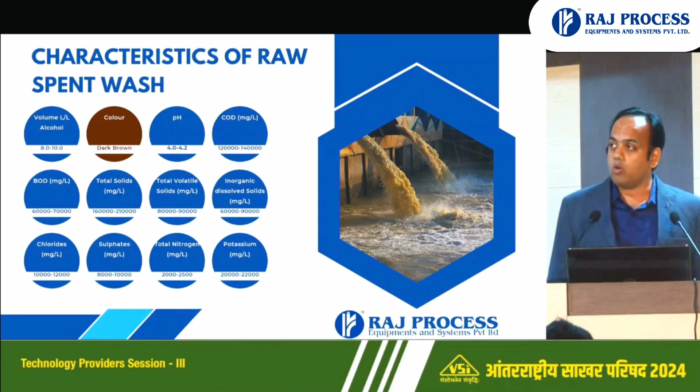So what can this organic load help us achieve with this spent wash? Now this is the typical flow diagram of how we are going to treat the spent wash. From the distiller you get the spent wash, ENA, RS, that is your final product, but what you get is the raw spent wash. We treat it in the biodigester, and after keeping it for 25 days, its COD value comes down by 65%, and you get the biogas.

That's a precious gas. 3 years back, government used to give around 46 rupees in hand. Now you get about 70 rupees when you convert this biogas into CNG. So rather than burning the biogas in the boiler, or incinerating the spent wash, we prefer you go with this bio-CNG concept.

Now, if you go with the bio-CNG concept, the question is what you will do with the biomethanated spent wash. The biomethanated spent wash is really very highly rich in potash if you convert that into potash-rich granules. Now, how are you going to convert this into potash-rich granules?

I'll shortly brief through this process flow diagram, and later I will elaborate each section. There's an integrated evaporator. After biomethanation, this spent wash goes to the integrated evaporator, and from the analyzer column you get the vapor. You can concentrate up to 5.5 to 10%.

The digester outlet is 5.5%. You can concentrate up to 10% or 8% based on the analyzer vapor load. Then it goes to the standalone multiple effect evaporator, which can concentrate up to 40%. Then it goes to the spray dryer, where you use boiler flue gas and some bagasse to raise the temperature, converting that into a powder. Then you mix press mud and bentonite, and you get a good granulated potash.

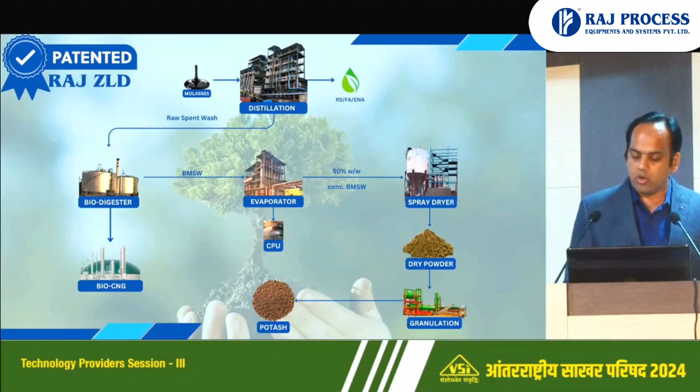I have the comparison, I will show it to you. That's why we say going with bio-CNG and this scheme of Raj ZLD will give you good revenue. In case of juice to ethanol, you don't have spent wash and you have steam, then this scheme gives you much more benefit. Second thing, how best is our evaporator, I will show that later. This is a typical setup, section wise I will be elaborating it.

The spent wash which you get from the distillery goes to the digester where you reduce the COD load. It's a CSTR type digester for 25 days retention time. Along with this, parallelly, if you have press mud, if you get 200 ton press mud, 100 ton you can store, and for the other 100 ton, another press mud digester can be installed.

Both the biogas streams can be passed to the H2S and CO2 scrubbing system. You get bio-CNG from both press mud as well as spent wash. From press mud, 1 ton gives around 90 meter cube of biogas. So it's very profitable to go for a combination of 2 separate digesters, one for spent wash, one for press mud, and a common bio-CNG unit.

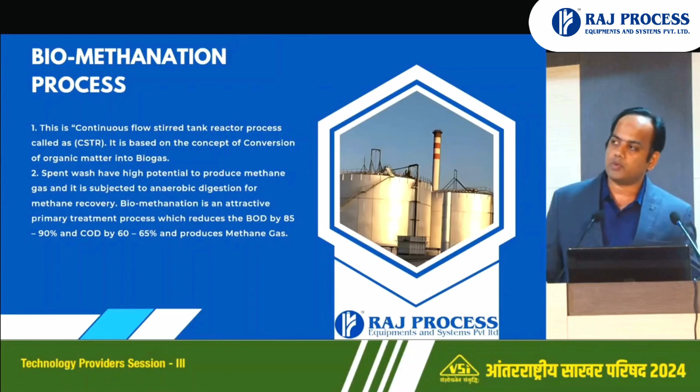Binu, yes, 2 more minutes.

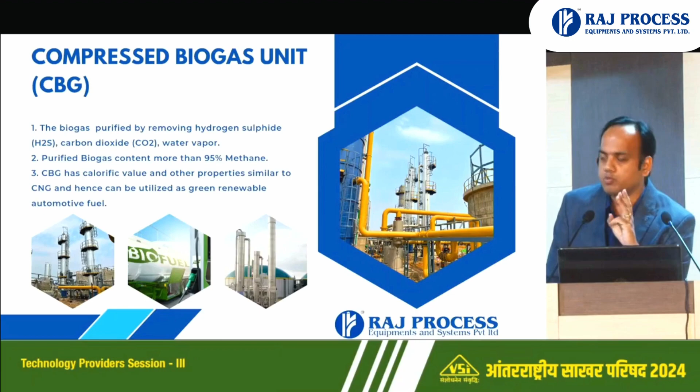Yes sir, fine. And this is the bio-CNG system. We have installed a 20 TPD bio-CNG unit in Jagrea, where you get 95% pure methane, using biochemical scrubbing as well as CO2 scrubbing system.

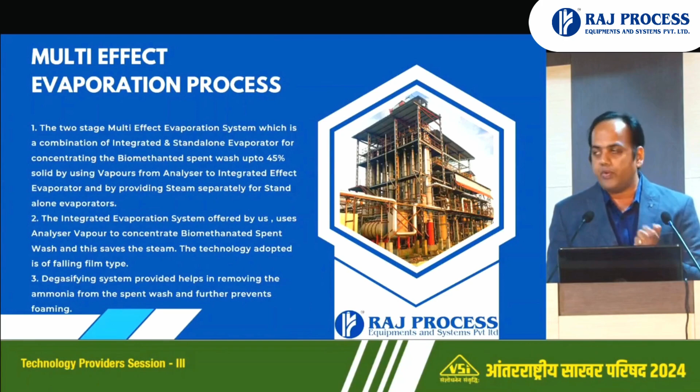And this is the multiple effect evaporator. This evaporator has a typical degasifying unit where we remove ammonia and then feed it into the evaporator, which concentrates it up to 40%.

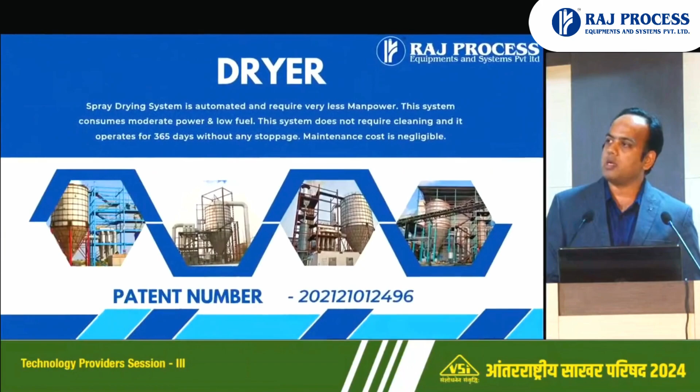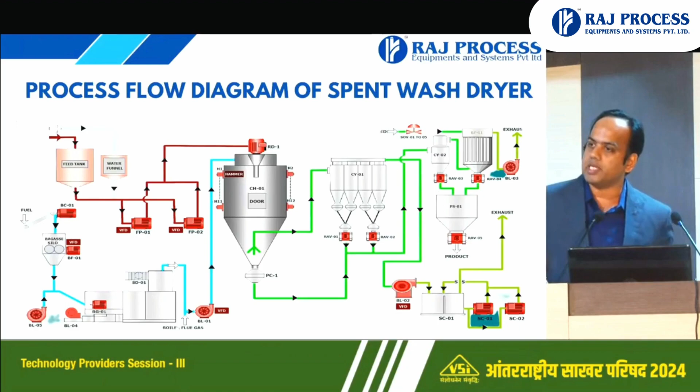What is the main technology in this? We are using boiler flue gas. This spent wash spray dryer is installed adjacent to the boiler so that we can utilize the boiler flue gas at 130 degrees Celsius. We boost it to 250 degrees Celsius and you get pure powder at the bottom.

And this powder has a very good potash content, about 21% of potash. Then it has an organic content of 25 to 30%.

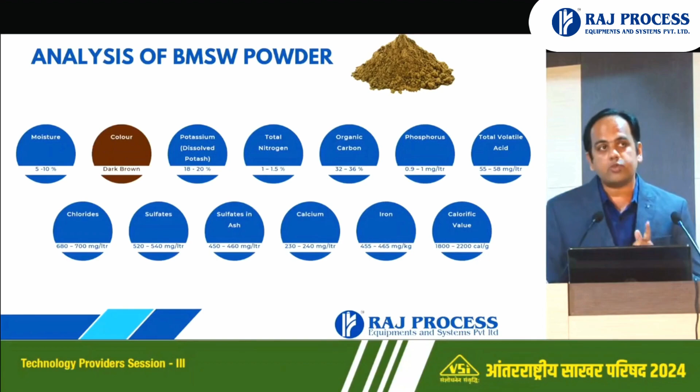This spent wash powder is very difficult to handle, so we have gone one step ahead by granulating it. We add bentonite and press mud to it to convert it into granules.

These granules get a subsidy of around 1500 rupees per metric ton. This is the letter from the ministry, like a second office memorandum, which government is boosting so that import of potash will be stopped.

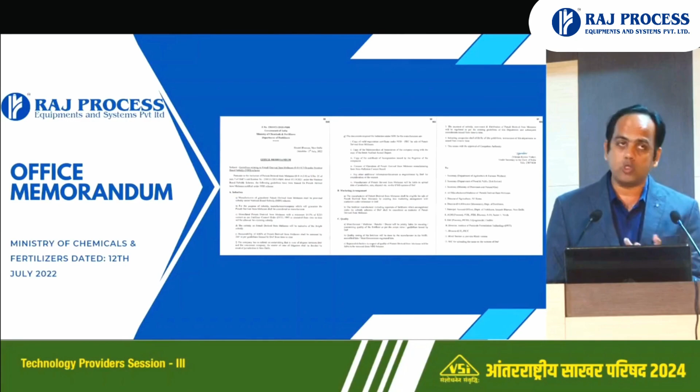And these are the customers who will procure this potash: IFFCO, PDM, Patanjali, GSFC, Deepak Fertilizer. There's good demand for these PDM granules.

Now this is a typical case study, sir. Just 1 more minute, sir.

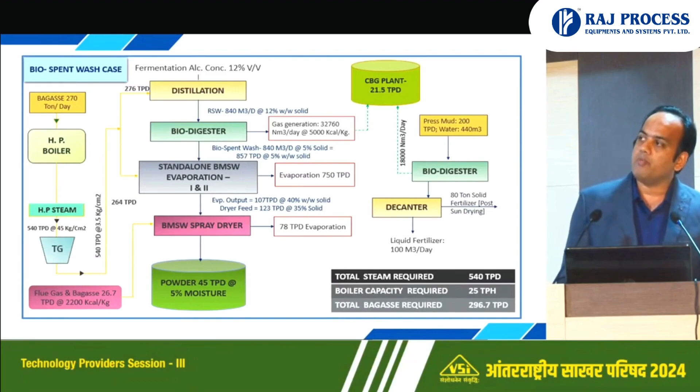This is a typical case study of a 120 KLPD molasses-based distillery. If it's a totally new distillery, it's a plain ground, and you are in a confusion whether to go for incineration or a drying scheme. For the drying scheme, the total boiler capacity required is 25 TPH, and you get a CBG of 21.5 TPD by using press mud, with a separate digester for press mud and spent wash.

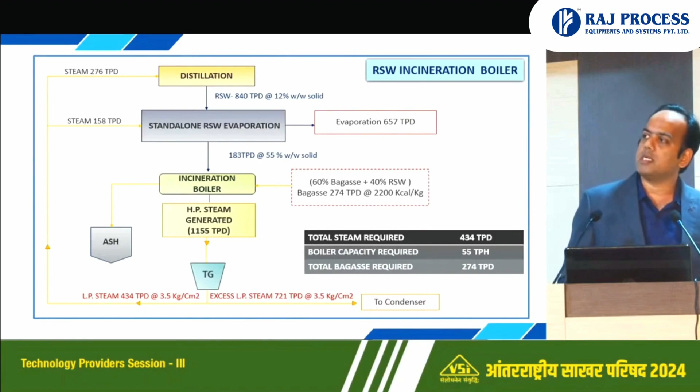And this is the raw spent wash incineration scheme where you install a boiler capacity of 55 TPH, using 60% bagasse and 40% raw spent wash. Now this is the total steam consumption.

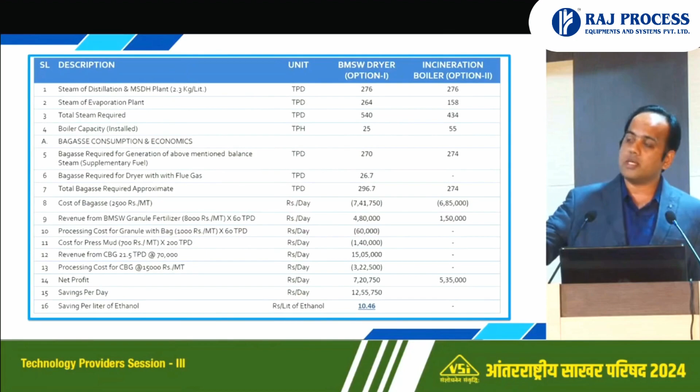4 years back it was only 3 rupees, because government used to give 46 rupees, now they are giving 70 rupees, so it has gone up. So the total saving comes to around 10 rupees per liter of ethanol, meaning for a 120 KLPD plant, you get a 12 lakh saving compared to incineration.

Now this is a total installation overview. It's a journey from 2015. Raj Process, just 30 seconds.

Raj Process started its journey from dryers in 2002, then moved into distilleries, cogen boilers and all. Our main forte is dryers, which we started in 2002, and we came up with this solution of how spent wash can be dried.

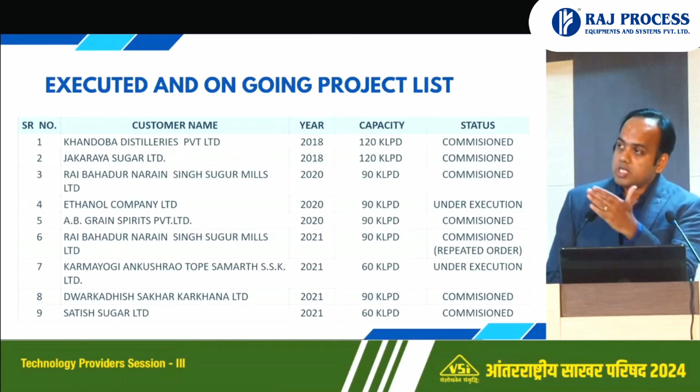So this is the total list of installations. We have come up to 50 plus installations of this technology.

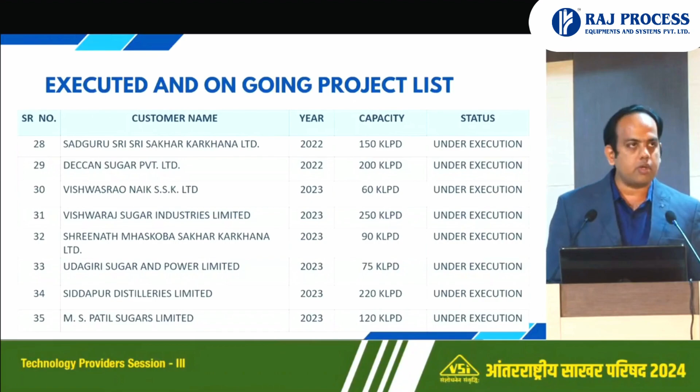Recently we are doing work in Venkatesh Krupa Sugar Mill in Shirur, and Siddapur Distillery, Indian Cane Power. There's a lot of installations, I will share this installation list.

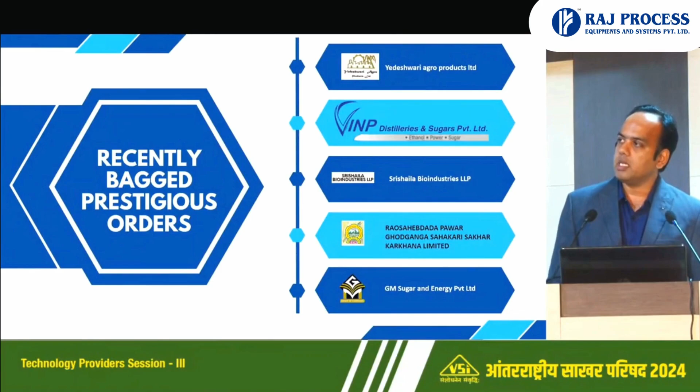Recently, also bagged VINP Distilleries, GM Sugars. Now we have a good presence in distillery as well. We have recently installed a 250 KLPD unit in Venkatesh Krupa.

You are all invited to see the plant and the technology out there, around 40 plus distilleries we have installations in. And in dryers, we have a good installation base in paddle dryers, spray dryers, tube bundle dryers, including dryers for zinc sulfate, sulfur WDG, and milk powder plants.

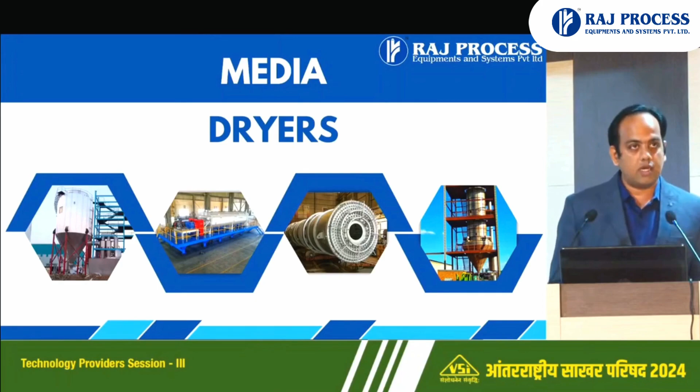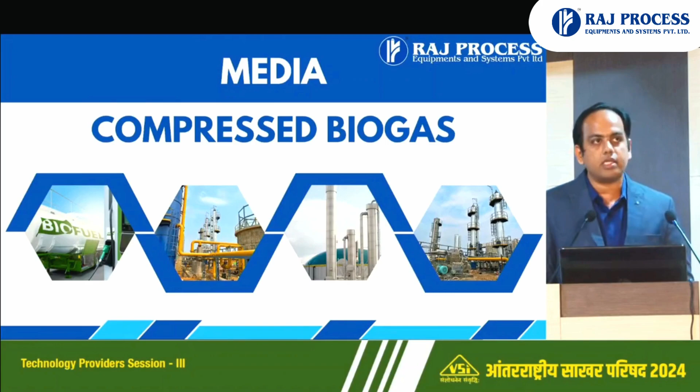And this is the recent compressed biogas unit which we have installed in Jakaraya Sugar for 20 ton per day. In Manjra Sugars we are installing, and in Srigonda also we are installing the same. In both it's a turnkey order with the distillery.